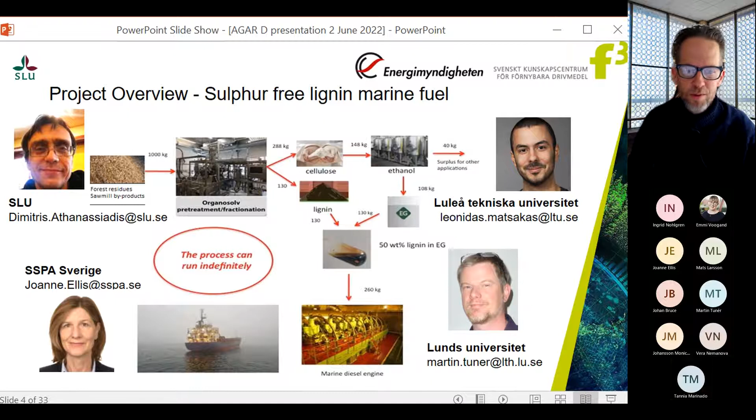So there's a spoiler alert now. The key findings were that the organosolv fractionation process was successfully demonstrated for a renewable biofuel. That fuel had an effective heating value of almost 19 megajoules per kilogram, and if you compare to fossil-based heavy fuel oil, it's an energy density of about half. So it would require sort of a doubling of fuel tanks or shorter trips if it was going to be used in practice. That may not be an issue for certain routes.

Production costs, from this Swedish production scenario that was analyzed, came out at about 37 euro cents per liter. And it's important to say that is without taxes, without labor and subsidies. So that's really a minimal cost for production. And then combustion was successfully carried out at Lund, and the fuel in this particular engine setup, which we'll maybe come back to later, showed relatively normal performance at low loads.

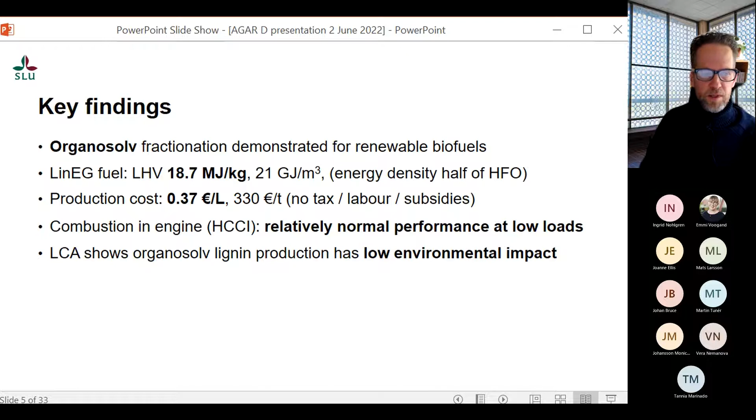We all are familiar with the climate policy, with the energy policy in the EU. It has two main objectives. Number one is to cut emissions of greenhouse gas, and the second is to secure more inland sources of energy. Now, those are in the toolbox. Those are achieved with setting targets, and then the next upcoming target is the 2030 target, where we're looking to cut 40% emissions, mostly through raising the amount of renewables that we use.

And this also ties into the more recent European Green Deal, which has a longer forecasted objective, and that's climate neutrality in the EU by 2050. So these are huge plans, and of course they're very expensive, something of the order of 260 billion euros per year until 2030 to carry out those tasks. So it's really about what's the best cost of achieving these targets.

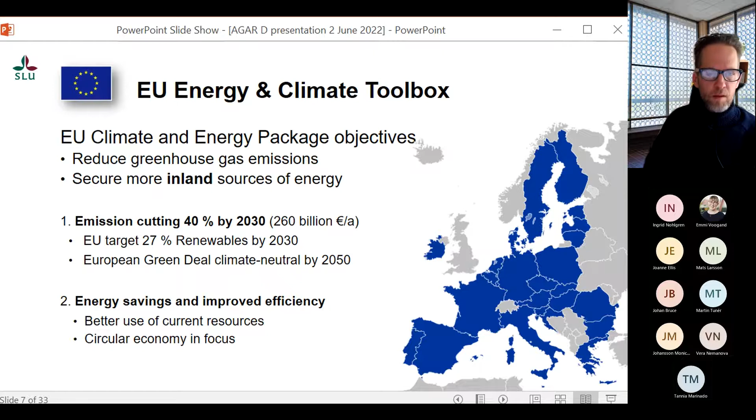And we've heard a lot in the media in the last few months, because of the war in Ukraine, about the importance of energy imports. So if you look at the EU, not for all their fuels actually, but in this case the orange line, which is just their crude oil imports, which is where marine fuels are derived from, you see that the dependency is about 90% at present, and most of the supplying countries are seen here. So it has become a hot topic, and it really highlights why the EU has selected inland production as one of the main pillars of their energy policy.

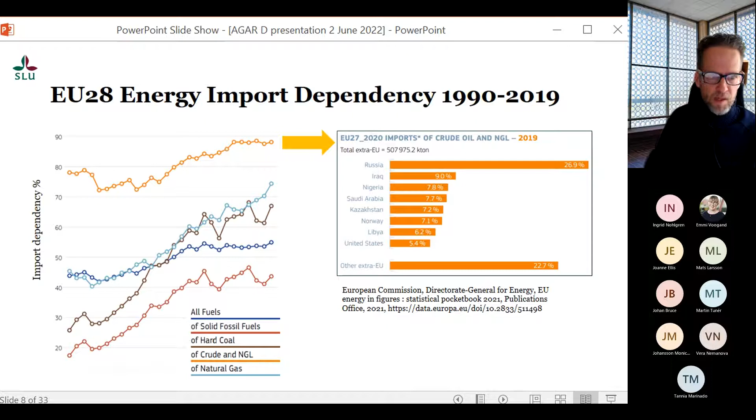It's derived from this kind of figure. So heavy fuel oil, a residual fuel oil, is a remnant product from petroleum distillation. It presents a lot of environmental risks, like from spills. It can contain toxic compounds, and combustion can lead to particulate matter, all kinds of bad, dangerous things. And it accounts for about 5% of the products from petroleum distillation.

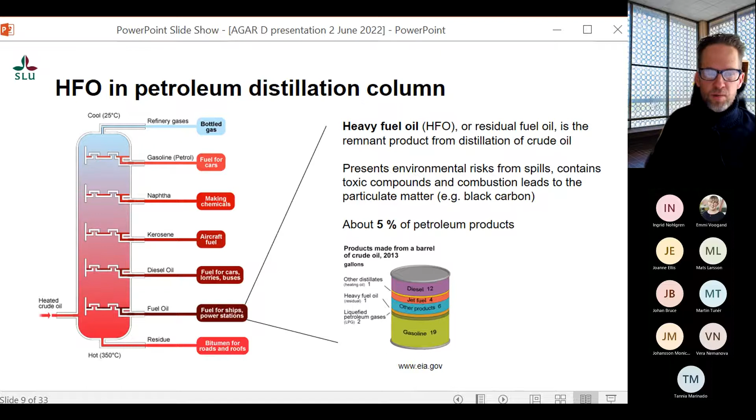And because it's the heavier option, the lighter fuels are tapped off the distillation higher up in the column. But with the fuel oil you get a lot more heavy substances, not as heavy as the bitumen, which is used in asphalt, for example, but you get a lot of inorganic compounds that you might not want. So that's kind of where it's coming from, and why, in a way, it's been traditionally quite a cheap fuel, and important to raise the standard of living globally over the last several decades. It's important to point that out as well.

And it's not just one product, like a wine or a coffee. It comes in different grades. This is just an old example of the grading system of heavy fuel oil. So the constituents depend very much on the origin of the petroleum and the refining process.

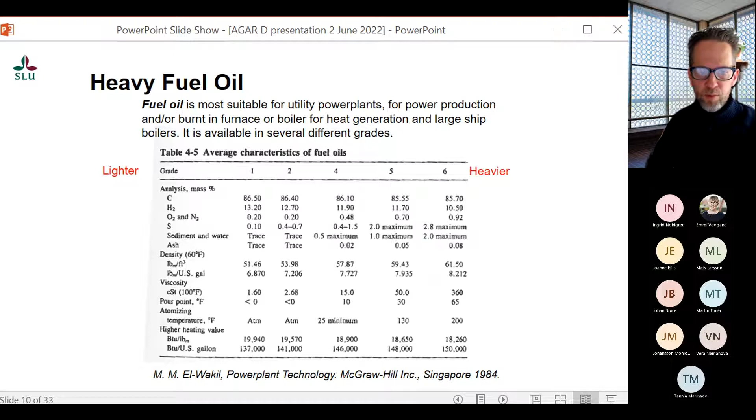But let's look now at the global fleet. So about 100,000 vessels of 100 gross tons or more are currently moving around in the oceans. And of course, there are regulations in place already that look to ban fuels with high sulfur contents. So the UN IMO has had a ban in place since 2020, with limits of 0.5% sulfur content. And then there are also emission control areas, such as the North Sea and the Baltic, which further restrict sulfur in fuels to 0.1%.

And like other sectors, greenhouse gas targets are desirable. So the IMO is looking for a 50% reduction by 2050, and the Swedish Ship Owners Association net zero emissions by 2050.

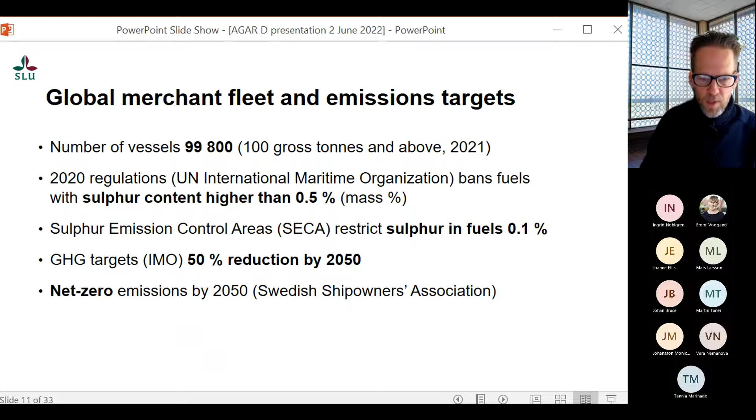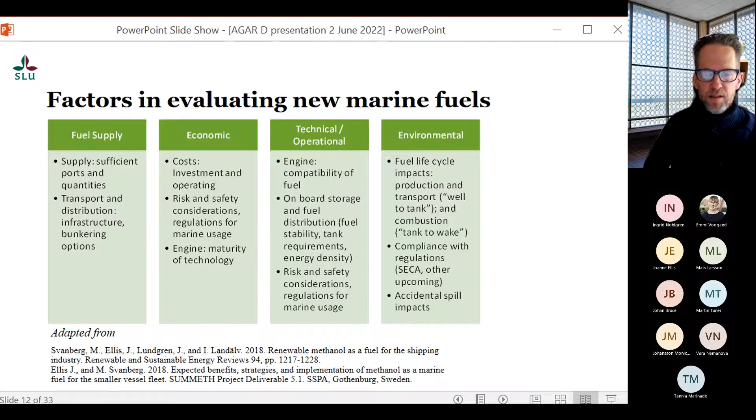So what do we have to think about when we replace heavy fuel oil? There's a lot of factors that come into it. Of course, there's security of supply. There's the economic factor, which is important, and then there's a technical factor, whether the fuels can be used in existing engines, or should there be retrofitting of the engines, for example, and then of course the environmental impact of the fuels, and do they sync up with our future goals.

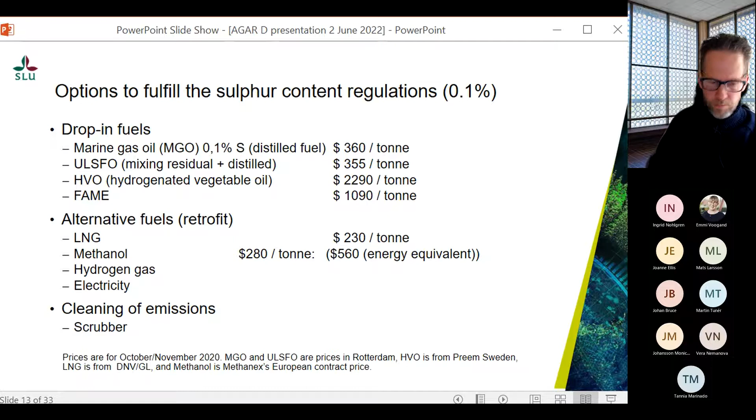So lignin is a source in the project that is looked at for production of fuel. And of course, we've all heard of lignin. It's one of the three main components of woody biomass. It's a supporting tissue in trees and plants, and it's very important already in production of things like wood pellets and particle board, where it has a kind of gluing effect because of its softening and rehardening at higher temperature and pressure.

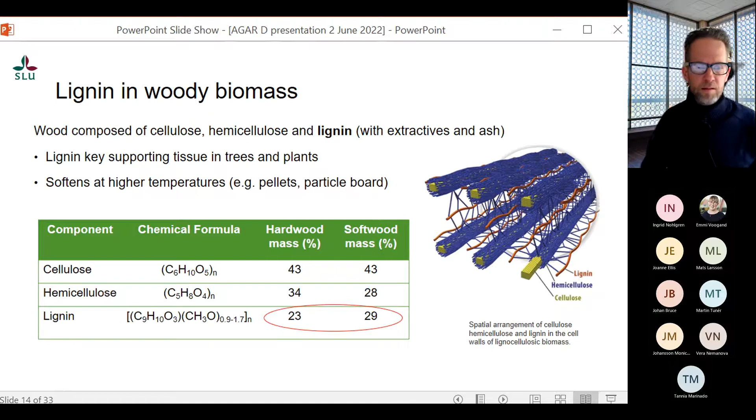So wood contains between 23 and 29% lignin. Lignin is very difficult to isolate from wood, and for that reason lignin that's isolated from wood is often called technical lignin. The biggest source of technical lignin that we have is from the pulp and paper industry. So kraft lignin, which is usually used in recovery boilers to get energy back in the pulping process. That's one of the main uses, but unfortunately it has sulfur. There are a few options to produce sulfur-free lignin, and the organosolv process is one of them.

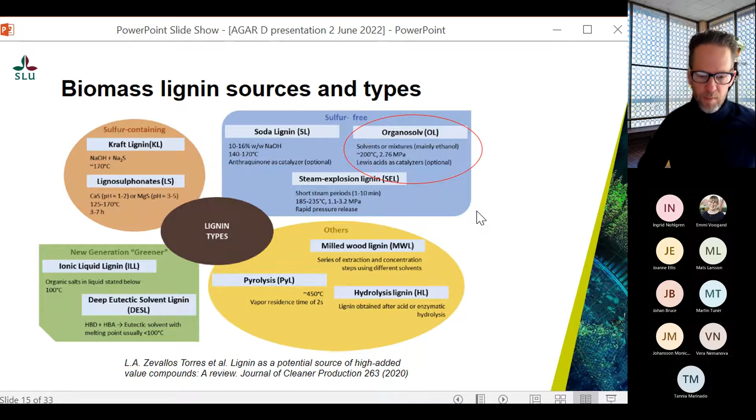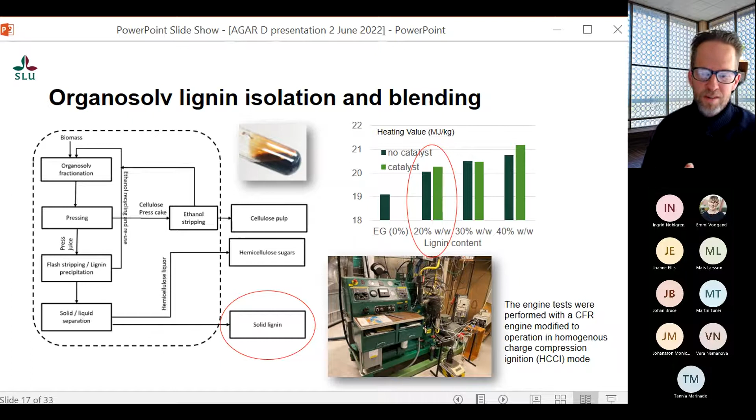For our project, different weight concentrations of lignin and ethylene glycol were tested, with a catalyst and no catalyst, to produce different blends, and we measured the heating value of those blends. Then one blend was selected for the combustion tests. And here is an image of the combustion engine at Lund University, and this particular one is modified to operate in what they call the homogeneous charge compression ignition mode for this fuel.

The biomass supply was evaluated for a kind of case study: if we had production in Sweden at 3 ports, in Umeå, Gävle, and Göteborg, then we could model quite accurately the costs of the forest biomass used to make the fuel. In this case, logging residues and mill byproducts.

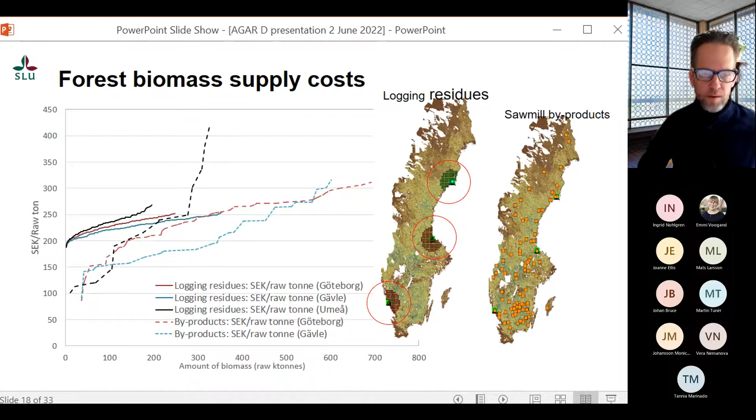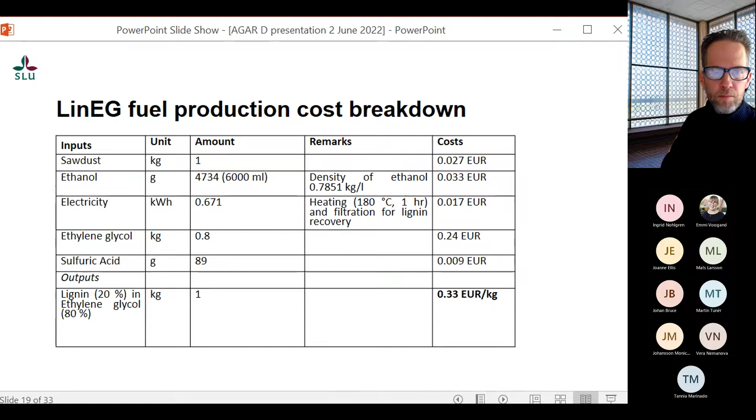LCA is carried out in a specialized software called SimaPro, and available to that software there are a lot of databases. And of course, it's a standardized method. So it's quite a powerful tool to look at different stages of production, and it really highlights the hot stages, where most of the environmental impact comes from.

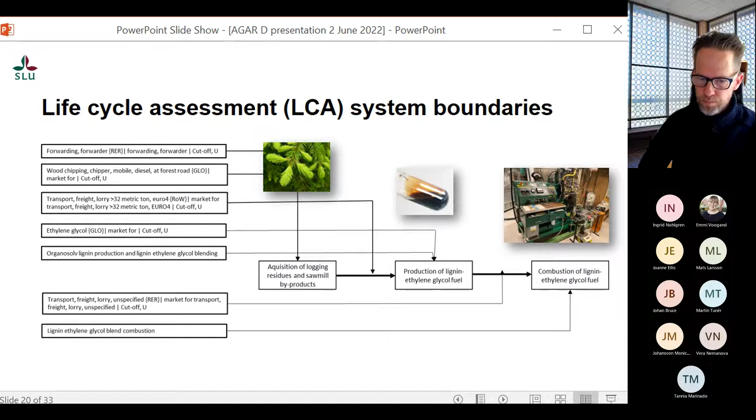And then the case study I mentioned from the economic analysis, it looked at comparing costs, environmental impacts, and operational impacts for two case vessels. And those case vessels were assumed to operate in the Baltic and North Sea region, where the sulfur emissions are limited to 0.1%.

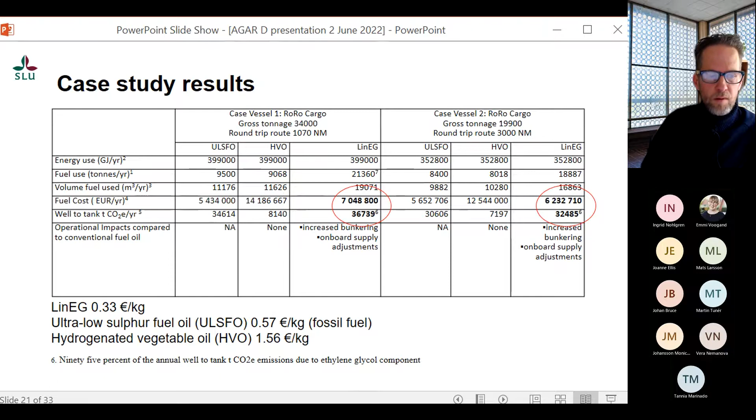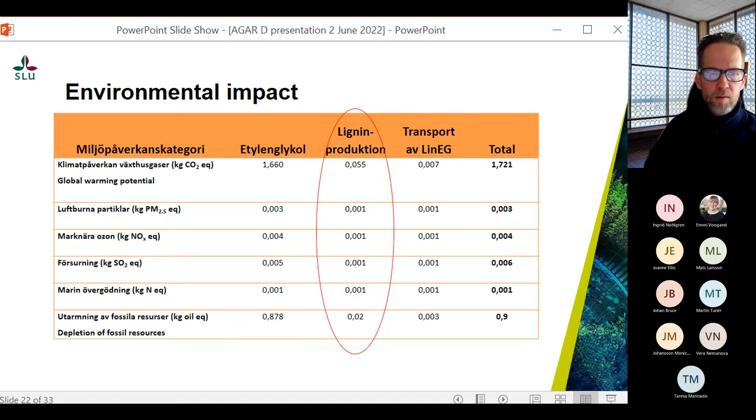So what kind of conclusions can we draw from this project, which is really a very thin slice of a huge field in biofuels? Well, these are quite general, and I hope we can discuss some of them after my presentation, but really there's still an overwhelming reliance on heavy fuel oil, hence the targets that we've set. But that presents a big potential, and of course also a challenge to shift to new fuels.

One path option has been covered in the project, and like I said, it's a narrow slice of all potential pathways, but it's been demonstrated at least that this is something that can be done. And the Swedish biomass, for the case of Sweden, where such large resources are available from forest products, really provides that inland production and, of course, energy security, not just for Sweden, but for other member states in the market. So that's very positive.